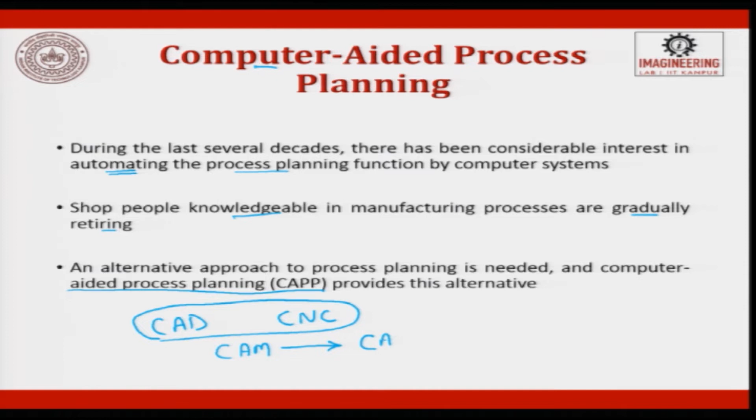Slowly it was also becoming costlier to have knowledge based people in the industry, and they were also gradually getting aged. So, the alternative for manual process planning is computer aided process planning, CAPP. CAD started evolving, then slowly CNC started evolving. Now people have started integrating these two and talking about CAM, and in CAM one of the verticals is CAPP.

So, the manufacturers have been pursuing an evolutionary path to improve and computerize process planning in the following 5 stages, which have evolved over a period of time. In stage 1, manual classification started. There is so much data, and you have to do a clustering of that data. So, you try to cluster it based upon shape, size or aspect ratio. You started classifying the data, and for each classified group you started establishing a standard process plan or procedure.

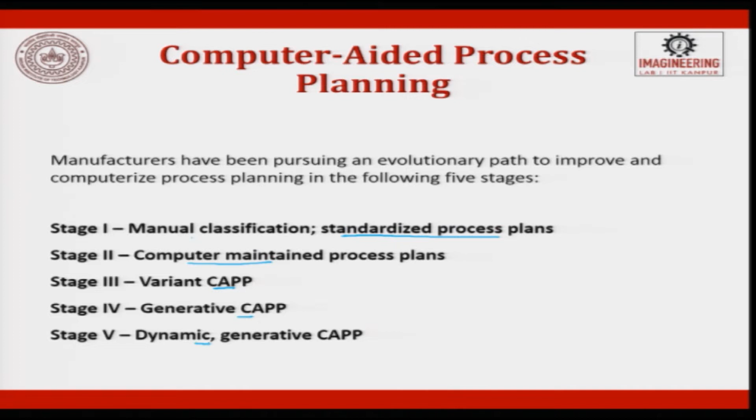So, stage 1 was manual classification, and for each classification they started establishing a standardized process plan. Then computers were used only for maintaining that data: these are the clusters formed, and for this cluster this is the process plan. So, the computer was used only to store and retrieve data. Then slowly software algorithms started developing. The next step was leading towards variant process planning, the next one to generative process planning, and the last stage is dynamic and generative computer aided process planning.

Manual classification and standardization is the process. What I am trying to explain is, you have a y axis and an x axis, and you have so much data. This data is nothing but different machining processes and some parameters. Now, what do I do with this data? I try to classify the data and form clusters.

When I form these clusters, there is a similarity within each cluster. So, this is cluster 1, maybe turning operations, this is a drilling operation cluster, then this is cluster 2. So, this is manual classification of the data, and how did you classify it? You looked at the data and grouped it. Prior to CAPP, manufacturers attempted to overcome the problems of manual process planning by basic classification of parts into families.

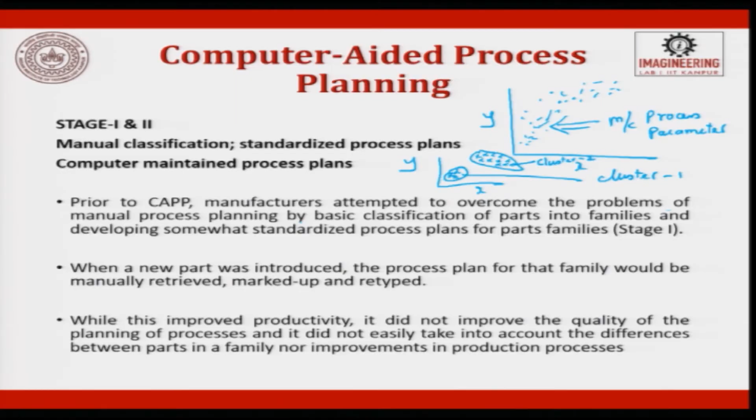So, now individual process plans are established for each vegetable. So, that is what we have done. So, manual process planning by basic classification of parts into families and developing a somewhat standardized process plan for that particular family. So, for all onions, for all potatoes, for all tomatoes.

So, let us do a similar analogy here. For all cylindrical parts, we try to do turning; all prismatic parts we try to do milling; for all hole generation processes you do drilling, and if the tolerances are high you do drilling and boring. So, that is what it is. For example, you have threads, internal threads, external threads. Internal threads, if you want to do them on a cylindrical shaft, use a lathe machine.

So, now what have you done? Looking into the part feature, you have classified, and the machining process is also established. Now, the standard is established. Now, looking into your tool availability, workpiece availability, machine status, you try to decide what are all the process parameters you have to use.

So, the standardization of process is nothing but the turning operation, and tweaking to individual requirements will be done by a manufacturing engineer at the shop floor. But he at least knows, or he is at least given a lead, that there is a standard process established for cylindrical shaft internal threading.

Okay. So, now you have established all these things. When a new part comes, the new part is now having varying hardness, varying diameter, tool size might vary, tool angles might vary. So, now what we do is the process plan for that family would be manually retrieved, marked up and retyped, plus it will also be edited to meet the requirements. So, you will pull that up, look into the algorithm, fit in your data values, and then you try to make this a standard established in your routing sheet.

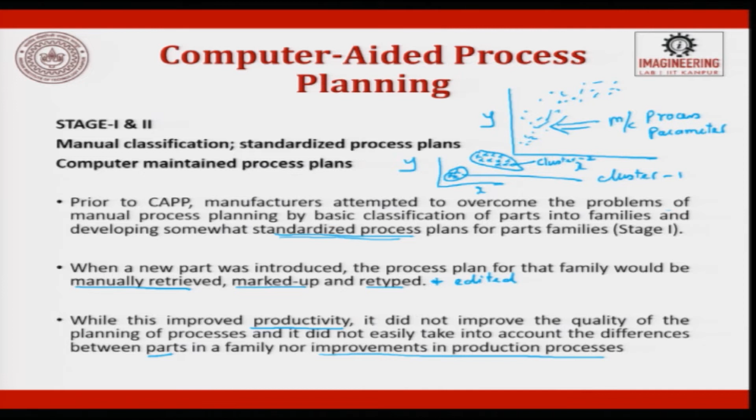So, this is why from manual classification and standardizing, we are looking for the second stage or the third stage to evolve in computer aided process planning. In the third stage, the initial computer aided approach evolved into what is known as variant CAPP. What is variant CAPP? Variant CAPP is nothing but the process plan is already given. This is the basic, and now what I do is I try to do some variation, like changing speed, feed, depth of cut, okay.

And suppose you have a drilling machine, one drilling machine which is CNC. Now, you want to change it to an automated machine, or you want to do it manually. These are some of the changes which you do on the master process plan to meet your requirements. These are variations which we do on the process plan to meet the requirements. The variant is based on group technology.

What is group technology? Group technology is nothing but the family you made, grouping of similar things based upon shape, size or manufacturing process. Group technology, coding and classification approach. So, what is coding and classification? For example, let us take your roll number. Your roll number is maybe 16 12 003. So, what is this? This is your roll number. So, a roll number in a factory is called the part number.

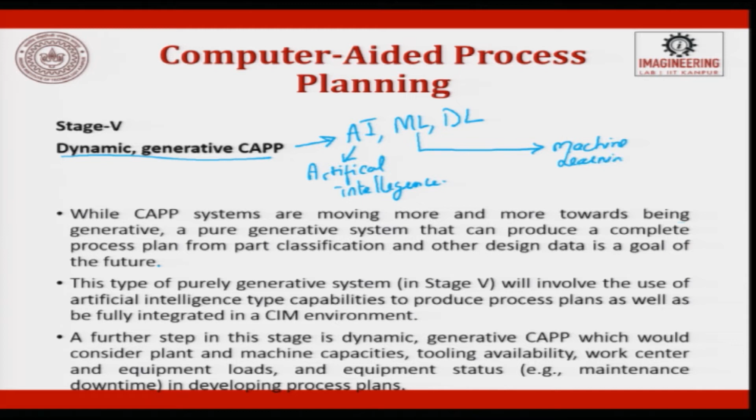So, this is nothing but using AI, ML and DL: artificial intelligence, machine learning and deep learning. These are the buzzwords which are now talked about more in manufacturing. When we are looking for CIMS, a computer integrated manufacturing environment, these techniques are nowadays exhaustively used in process planning.

A further step in this stage is dynamic and generative CAPP, which would consider plant, machine capacities, tool availability, work center, equipment loads and equipment status in the developing process. Dynamic generative CAPP also implies the need for online display of the process plan on a work order oriented basis to ensure that the appropriate process plan was provided to the shop floor.

So, when we talk about dynamic, we are trying to keep the customer requirement also, the customer requirement and the current loading of the factory. Loading of the factory means what are all the machine loads and how these are done. So, we start looking forward to optimizing machining center usage, tight integration with the manufacturing resource planning system. So, we are now trying to integrate the shop floor with your office, where they are involved more in sales and service. So, this interaction is going to happen.

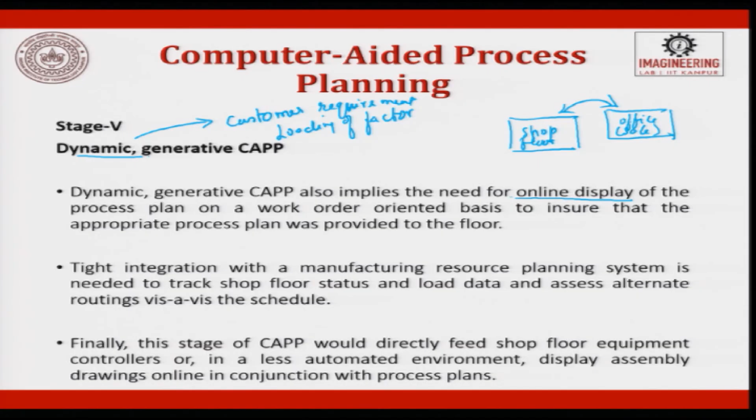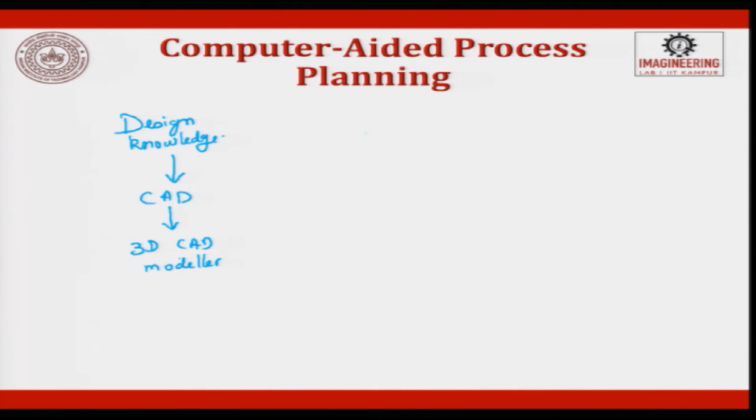So, if you want to put computer aided process planning in a schematic diagram, we have design knowledge, this leads to the CAD system, and this goes to the 3D CAD modeler. Okay. So, this is one vertical. Next is process planning knowledge. This will lead to CAPP, computer aided process planning, and this gives you a process plan. The other one is manufacturing knowledge. This goes to CAM and this goes to NC code.

So, these are the results, and the top one is the knowledge base. So, design knowledge, process knowledge, manufacturing knowledge leading to CAM, process planning to CAPP, and design knowledge to CAD. So, from here we generate the modeler, process plan and NC code. So, let us see the framework for computer aided process planning.

So, here we will have the organizational planning system, then we will have MRP, which is nothing but material requirements planning, and we also talk about capacity planning. Then we will have CAM, okay. So, this we will have actual data, then this is production control.

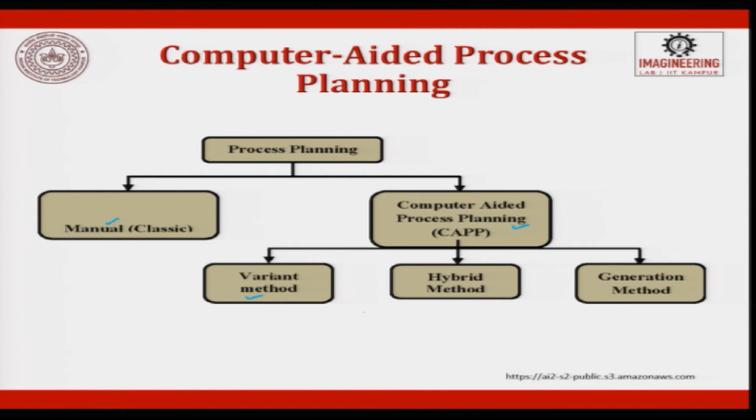But currently you should understand this is the framework of computer aided process planning, wherein we get the data from materials resource, process planning, CAD. So, this data comes to CAPP, and CAPP data is given to the NC program, and these keep talking to each other to develop a process plan for machining a part or developing a part. So, whatever we have studied till now, if we put it in a block diagram, we have manual process planning and computer aided process planning. Computer aided process planning is classified into variant, hybrid and generative.

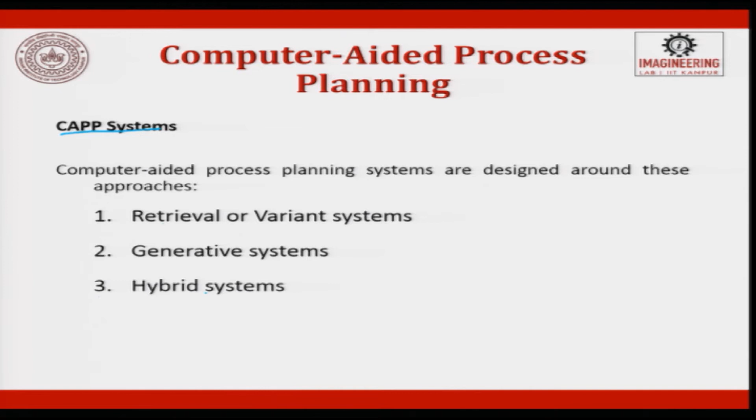Now, let us look into computer aided process planning. Computer aided process planning systems are designed as retrieval or variant systems. Next is generative systems, we went through it a little bit. Then the last one is going to be hybrid systems. So, what is retrieval type CAPP? Based upon group technology and part classification and coding, a standard process plan is stored in a computer file for each part code number.

So, standard plans are based on current part routing in use in the factory or on an ideal plan prepared for each family. So, whatever is already stored, you just call. So, basically if-then statements will be used. So, it is basically an expert system that will be used here. If these are the conditions, then lead to this answer. So, you will have a knowledge base, you will have an inference engine, and then you will have input given.

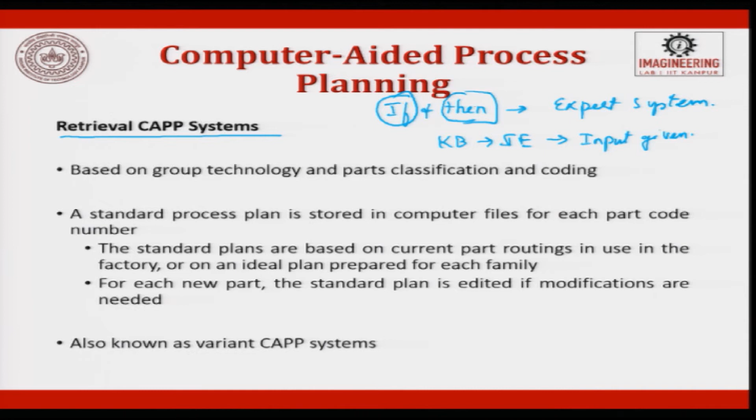If there is traffic congestion over Delhi, and if there are a lot of flights landing, and if there is a visibility problem, then please do not start the flight. So, that is if and then. Okay. So, retrieval CAPP is basically working on an if-then system only. So, here a standard is already established. You put the part number and call for it, then immediately the process plan will be shown in front of you and you start working on it.

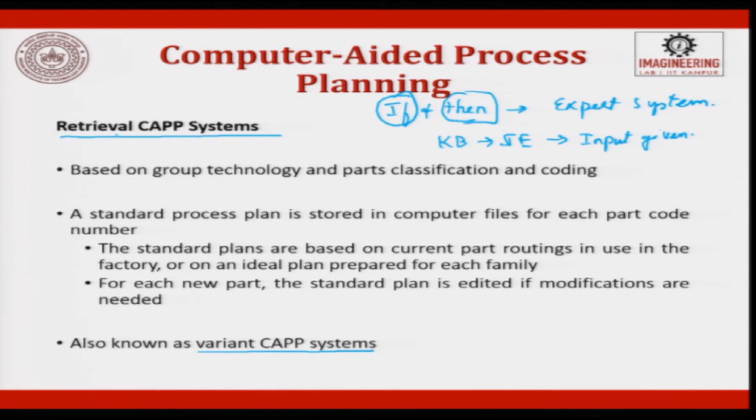Here there is no knowledge; whatever is available there you bring, and when a new product comes, it will be very difficult for you to establish and run. So, it works only on retrieval: whatever is stored, it retrieves and you start working. Standard plans are based on current part routing in use in the factory or an ideal plan prepared for each family. For each new part, the standard plan is edited if modifications are needed, also known as variant CAPP. Retrieval, otherwise known as variant CAPP, is almost the same.

The system logic involved in establishing a variant process planning system is relatively straightforward. It is one of matching a code with a pre-established process plan maintained in the system. Many times when you go to a textile shop, you say, here is a cloth I have, can I get a similar color cloth? So, immediately the person keeps the cloth you have given him in his hand, goes to the shelf where similar colors are identified, places them beside each other, picks the closest match and says, please sir, see this. So, this is the way variant CAPP also works.

You have given something, the computer will quickly try to match it with an already existing one, and whichever closely matches, it pulls out from its library and displays it in front of you. The initial challenge is in developing the GT classification and coding. How do you classify it? Because the textile cloth example was easy, but in a factory you have to establish a coding system.

So, you establish a coding system, and there are several codes already there. Each code is nothing but a part number, each part number has a process plan, you just pull that out and start using it. So, the initial challenge is in developing the GT classification and coding structure for the part family and in manually developing a standard baseline process plan for each part family. Initially it will be difficult, then on it becomes easy. The first time you have to establish it, that is a challenge.

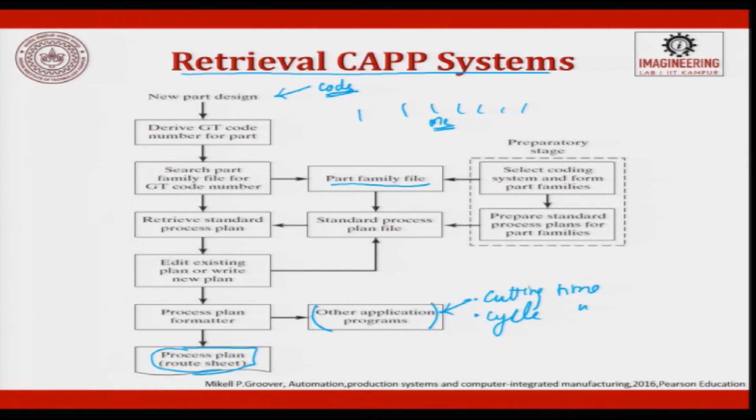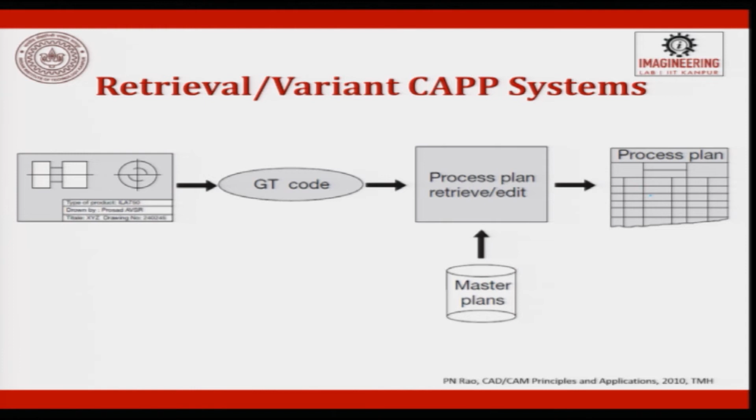For example, this application is calculating the cutting time, calculating the cycle time. So, all these things are done in the retrieval CAPP system. So, in a retrieval CAPP system or a variant CAPP system, you can see a new part coming, a GT code getting established, your process plan is retrieved. When you start doing this process plan retrieval and editing, you pull out something from the master plan and then you start editing, so that you try to meet the existing part.

If the file does not contain a standard process plan for a given code number, the user may search the file for a similar code. I do not get the exact code, but now I look for a similar code. So, the similar code number is taken out, you edit it to your requirements and finally, you make a formatter. The formatter may call other applications like determining the cutting conditions, calculating the standard time, computing cost, all these things will be done and finally, the retrieval CAPP gives the final option.

So, in generative type, rather than retrieving and editing an existing plan from the database, the process plan is created using a systematic procedure that might be applied by a human planner. This is what I said, driving a car. You have been taught to drive a car, the logic told, the inputs given. Now, depending upon the situation, you try to maneuver and do it. In a fully generative CAPP system, the process sequence is planned without human assistance and without a predefined standard plan. So, here there is not a set condition told to you, but the logic is taught to you.

Designing a generative CAPP system is a problem in expert systems. Expert system variant retrieval works on the logic of if and then. If you have a new product and you can somehow understand the new product and put an if condition, then it comes. Expert systems work very well in the variant and retrieval system. But in generative type, you are supposed to use artificial intelligence, neural networks, fuzzy logic. So, particle swarm algorithm and ant colony algorithm are all used, wherein the data is there, the algorithm is taught and the evolution of result is different.

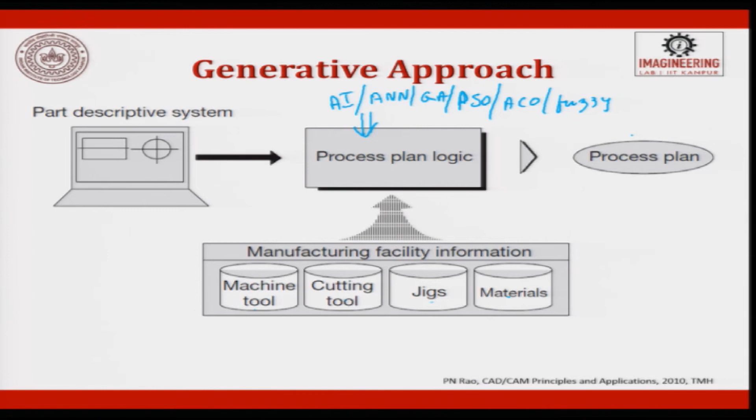The first key to implement a generative system is the development of a decision tree appropriate for the items to be processed. Decision tree. So, this is what I told you, we teach you basics. These decision rules are specified under decision tree, computer language involving logical if-then type statements or artificial intelligence approaches with object oriented programming. This is what is called OOPS, object oriented programming, which is exhaustively used in database software.

Why? Because you have so much data, how are you going to logically store the data such that the program can quickly work, retrieve, and bring you the output. The nature of the part will affect the complexity of the decision rules of generative planning and ultimately the degree of success in implementing the generative CAPP system.

The majority of the generative CAPP systems implemented to date have focused on process planning for fabrication of sheet metal parts or less complex machined parts. Still it is evolving; generative has not reached its maturity. In addition, there has been significant recent effort with generative process planning for assembly operations, including PCB assembly.

Why it is so prominent in sheet metal is 2D profiling. The thickness is too small and along the thickness there will not be any variation; in x and y there can be a profile or a geometry. But when you do machining of a 3-dimensional object, along the z direction there is variation. So that makes life more complex for the generative type. So it is exhaustively used for sheet metal and PCB assemblies.

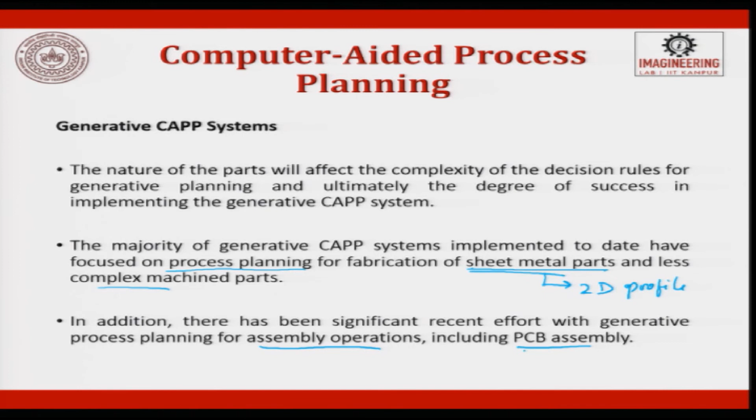The second key of generative process planning is the available data related to the part to drive the planning. Simple forms of generative process planning systems may be driven by GT codes. So GT or features technology, FT type classification without numerical code, may be used to drive CAPP. This approach would involve the user responding to a series of questions about the part. So you are asking questions, and from the answers to those questions what finally comes out will be a generative CAPP, which eventually will work on feature oriented data captured in a CAD system during the design process. This data can directly drive CAPP.

So in CAD also I was trying to talk about feature recognition. If there is a feature, say eye is a feature, nose is a feature, mouth is a feature, for each feature there is a process plan already established. So when you put this entire object into CAD, it will quickly extract those data, then go to the feature based process plan which is already there in the logic. It will quickly pull out all those things and tell you the best process plan to be used. So this is the generative type process plan, and there is a hybrid, which is semi-generative CAPP, in between variant and generative.

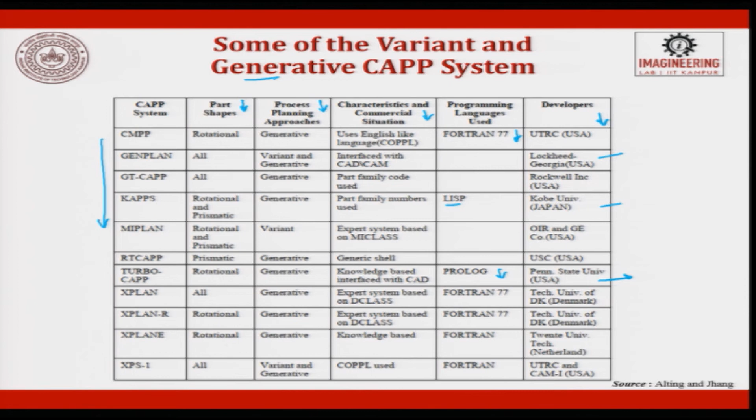Lisp is used in AutoCAD also, so you can write a library in AutoCAD. So we use Lisp or Fortran 77 or Prolog for writing those programs in the interface, so that the software can use it. I have also given who the developers are. Some are developed in universities; here you can see US based, here university based. Some industries are also playing a major role in it. So even today there is nothing called a 100% generative perfect CAPP system. They are all still in the hybrid stage, evolving.

So, the CAD-CAM integration of CAPP: a frequently overlooked step in the integration of CAD and CAM is process planning. A CAD system generates graphically oriented data and may go so far as graphically identifying metal etc. to be removed during the process. In order to produce NC instructions for CAM equipment, basic decisions regarding equipment to be used, tooling, and operation sequence are to be made. This is a function of CAPP.

So we are talking about CAD, CAM, and the function of CAPP. Without some elements of CAPP, there would not be such a thing as CAD-CAM integration. Between CAD and CAM, CAPP is the biggest vertical, which has to play a role in understanding the drawing and converting it into a manufactured part.

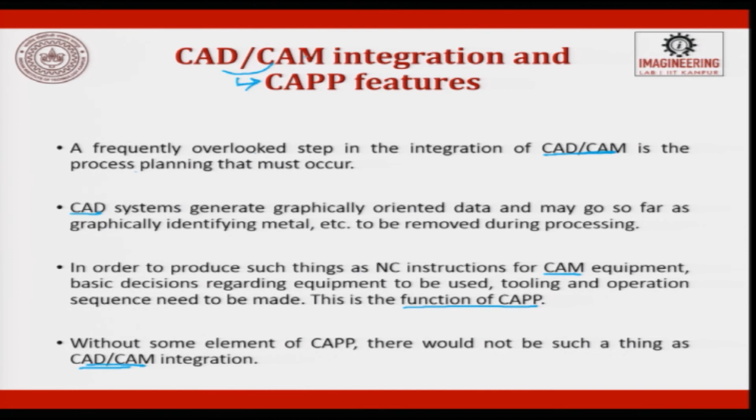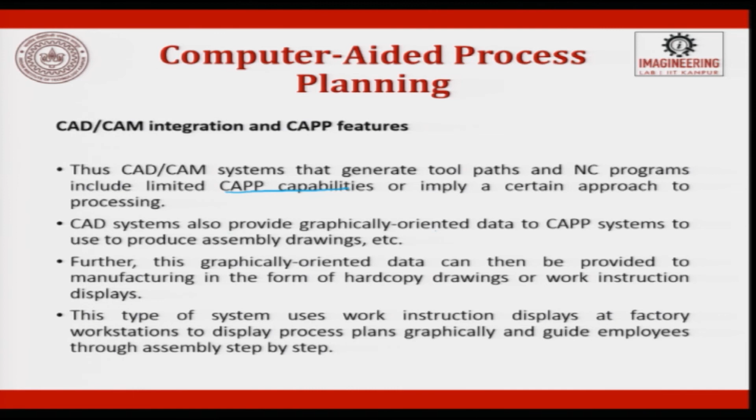Thus, CAD-CAM systems that generate tool path and NC programs include limited CAPP capabilities or imply a certain approach of processing. The CAD system also provides graphical oriented data to the CAPP system to use to produce assembly drawing. Further, this graphical orientation data can then be provided to manufacture. So, this is how a CAD and a CAM is integrated by using CAPP.

So, here let us just see CAD here. This is CAD where we have studied all the graphical things. Then we have a CAPP here, then we have a CAM here. So, the function of a CAPP is going to be, it gives you a synergy, which results when CAPP is integrated with a CAD or CAM system.

So, CAPP becomes a direct connection between design and manufacturing. Okay. So, this is the way CAPP features in between CAD and CAM. This is very important. So, if we look at it, we have a design layer, we will have a manufacturing layer,

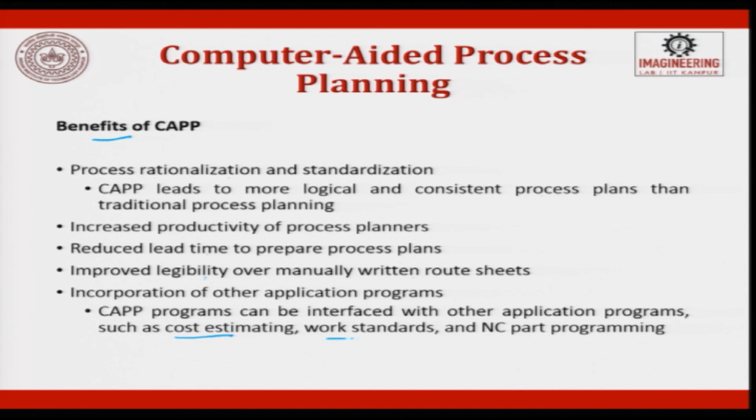So, when there is a huge database, errors are prone to happen, the storage space becomes large, the retrieval becomes difficult, and then you need a huge server space to use it. So, increasing productivity of the process planner can happen by using CAPP, reduced lead time, and improved legibility over a manually written routing form. Other application programs can be integrated with CAPP, so that cost estimation, work standards and an NC part program can be done.

In a detailed survey of 22 large and small companies using generative type process planning, there was a 58% reduction in process planning efforts, 10% in labor cost, 4% in materials, 10% in scrap, 12% saving in tools and 6% reduction in work in process.

Work in process is when the part is moving between one station and the other station. From the start to the end, the parts which are lined up are called work in progress, which cannot be sold, but exist in your factory, and cannot be stored as inventory either. It is in between. Inventory can be a semi-finished process or a part.

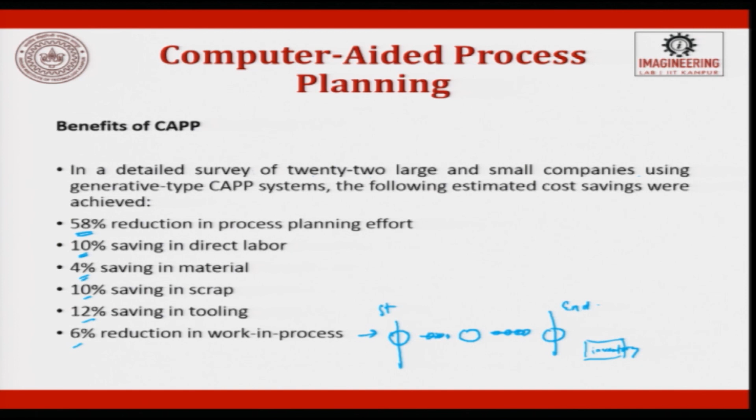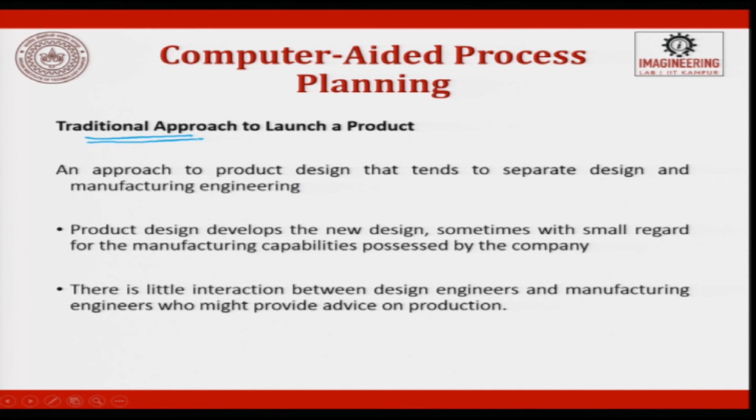Benefits of CAPP. So, the traditional approach to launch a product was an approach to product design that tends to separate design and manufacturing engineering. The product designer develops a new design, sometimes with small regard for the manufacturing capability possessed by the company. There is very little interaction between the design engineer and the manufacturing engineer. That was the traditional approach when a new product is launched.

The emphasis of planning for the future is distinct from process planning, because it is concerned with products being contemplated in the company's long term plans rather than products currently being designed and released. So, the emphasis of planning was further developed at this stage. This led to advanced manufacturing planning, which attempts to forecast the new products that will be introduced in the 2 to 10 year future, also done by using CAPP.

So, how many new products have come? Based on the new products, I will understand, okay, the product life cycle is going to be short. So, I have to prepare myself for the next possible variations, and to determine what production resources will be needed to make those future products, we use manufacturing planning.

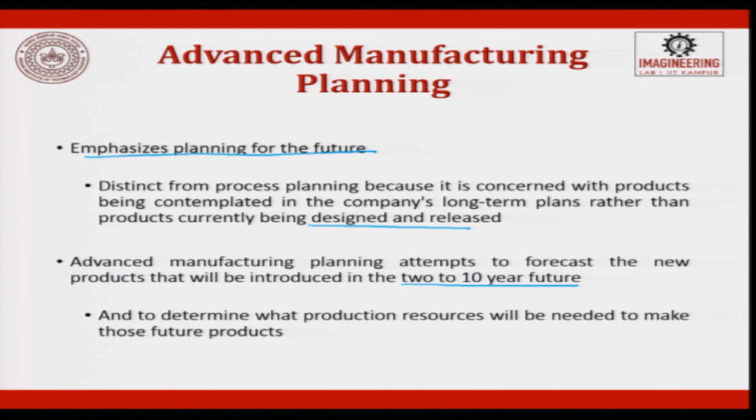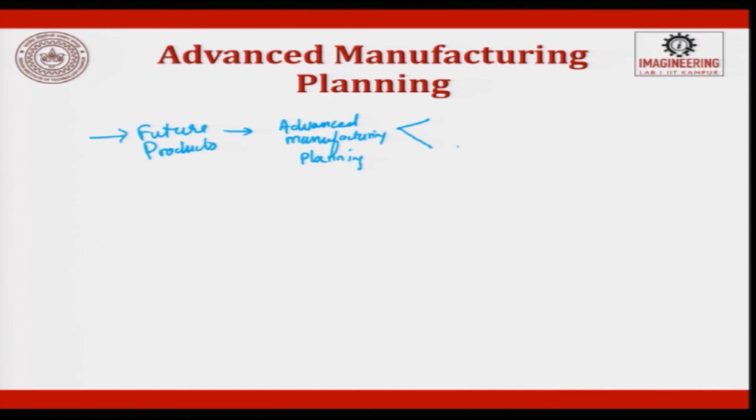So, in a schematic diagram, if I have to represent the advancement of planning, it will be future products, then advanced manufacturing planning. This has two classifications. One is new technology, the other one is existing manufacturing capability. Then this will give future manufacturing capability.

Okay. So, this advanced planning will look at new technology getting evolved, new technology evaluation, investment, project management, then facilities planning. All these things are for the future, and then finally you will get manufacturing research. Okay. So, this is the new product process strategy. So, you have all these data, and these are flowing like this.

So, advanced manufacturing planning today is trying to take all the new technologies, investment, facilities, manufacturing, what is the lead time, how is the product going to perform, what is the customer's feedback, all these things are getting integrated. Earlier we were talking about CAD and CAM, now CAPP comes in between. Now we are also trying to bring ERP, enterprise resource planning, into CAPP, and now CAPP is moving to the next era of dynamic CAPP.

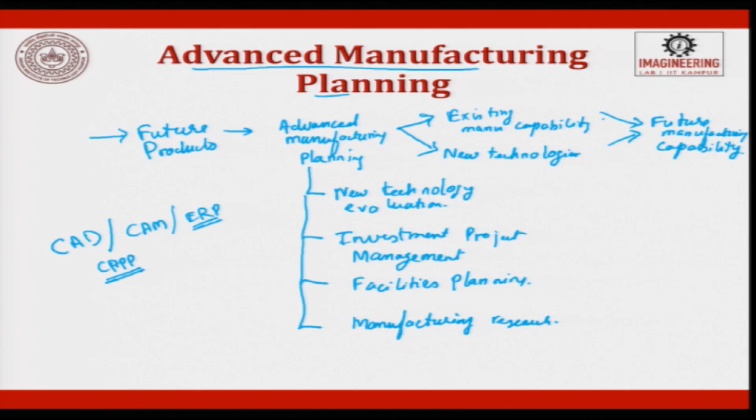It also looks at how the new products are going to perform, what is the technology, and how the old technology information is used to change. For example, as the new smartphones keep coming, an individual quickly learns and starts using the smartphone. In the same way, people are using whatever CAPP already exists. As new things come, they learn them and start using them for futuristic requirements.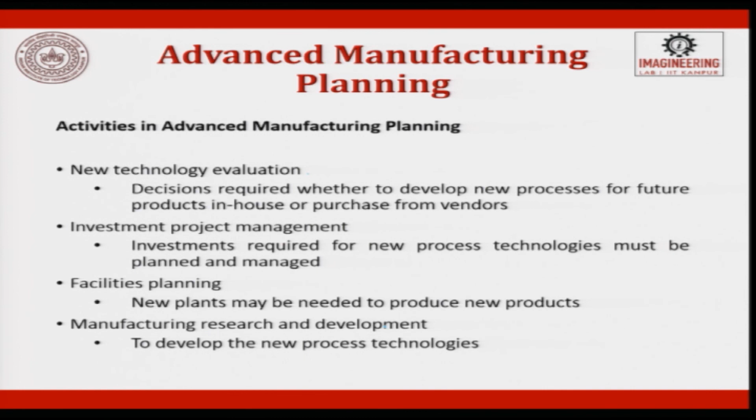So, in the activities involved in manufacturing planning, new technology evaluation will happen, and then you will have investment project management, facilities planning, and manufacturing research and development. So, all these are the activities in advanced manufacturing planning.